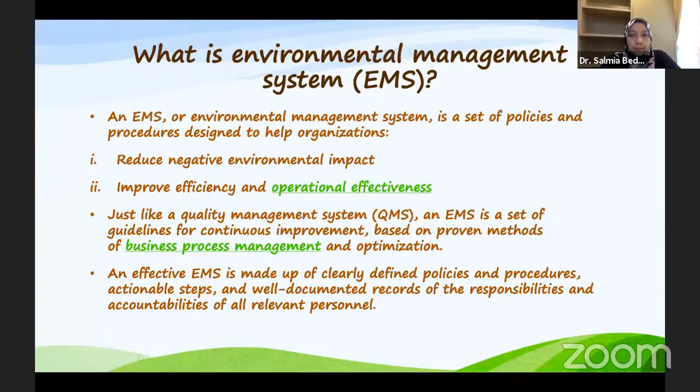What is the benefit of ISO 14,000? From the ethical part, it's our duty to look after the world and hand it down in good shape to the future generation. We hope that our kids, maybe in another 20 years, can still see all the trees, all the grasses, everything, so that they know the world is yet to be depleted. If we want our kids to see what we actually see nowadays, it's our duty to take care of our environment.

From the economic benefits, we also need to take care of conserving resources and not generating waste products or waste energy. We need to minimize the waste and also optimize it for recycling activities, for example.

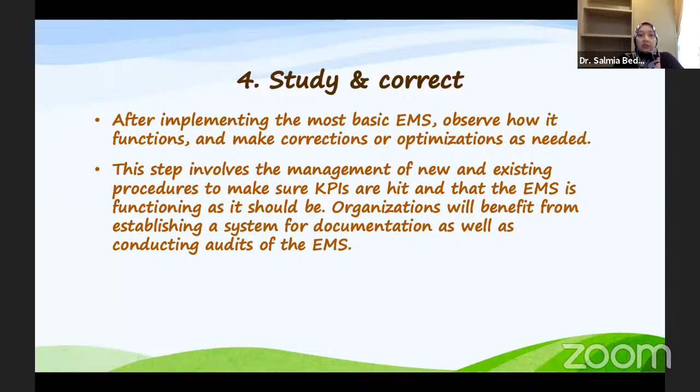Right, then after the planning, implementation is coming. This step will involve the execution of the plan. After implementing the most basic EMS, observe how it functions and make correction or optimization as needed.

Then after that, the management review process, and finally continuous improvement. So what needs to be improved, along the 5 processes? In the continuous improvement, based on ISO 14000, the method we'll use is plan, do, study, and act - PDSA we call it. So this is under continuous improvement.

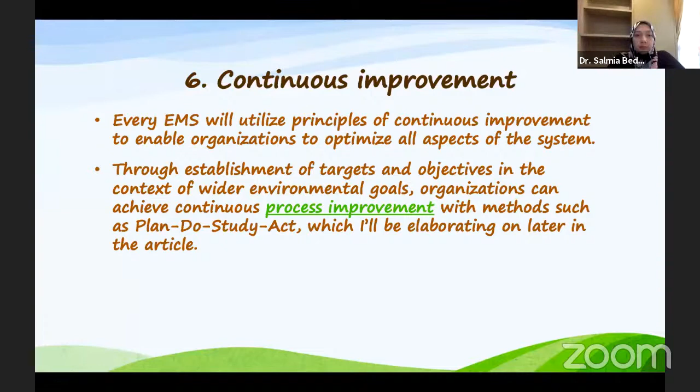So this is the principle of environmental management. I can conclude that environmental management is actually taking care of the environment. So how can we take care of the environment? We need to be certified. What else? We need to also be familiar with the environmental management system.

And then the awareness of sustainable development. Environmental legislation alone is not sufficient - some of it is not really sufficient. Self-regulation by industries, global competition on the products, and trade barriers, and there may be no standard indicator for industries that give environmental commitments. So it also requires a standard to take care of these demands in the form of management tools.

So EMS is part of the overall management system that includes organization structures, planning activities, responsibilities, practices, procedures, processes, and resources for developing, implementing, achieving, reviewing, and maintaining environmental policies. This is what EMS is all about.

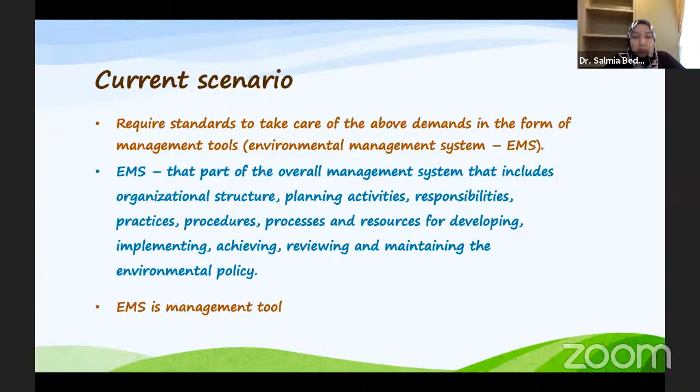In conclusion, EMS is one of the management tools. So common questions in EMS, related to the product - is the product able to reduce raw material input? This is a common question.

Less impact of material use, improve efficiency and lifespan. Is it more recyclable? And also packaging alternatives as well.

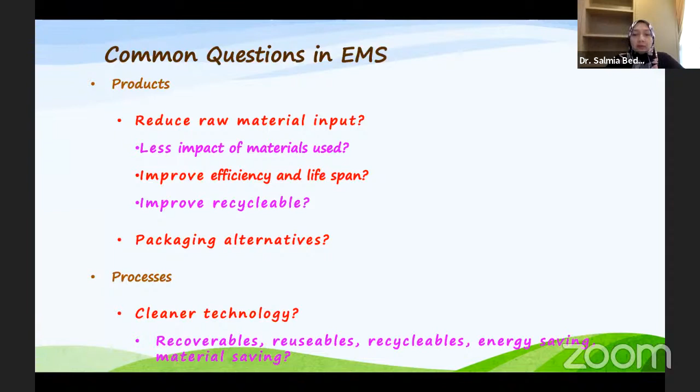Related to process - is it related to cleaner technology? Is it recoverable, reusable, recyclable, energy saving, or material saving? The use of natural resources - is it renewable energy? Is it less fuel? Does it maintain conservation? Or is it less polluting?

Some legislation - I highlighted here, this is the Environmental Quality Act in Malaysia, just as an example. In Malaysia, it is established by the Department of Environment, DOE, in 1976.

So we need to formalize this environmental management. There will be fines and penalties under restriction on pollution - maximum 500,000 ringgit Malaysia or up to 5 years jail, or both.

Compounding offense - the maximum fine has also been increased up to 2,000 ringgit Malaysia.

What else - there are 3 strategies in the act to regulate pollution. The other two are to prevent and abate any form of pollution. So we in Malaysia are also very concerned about the environment.

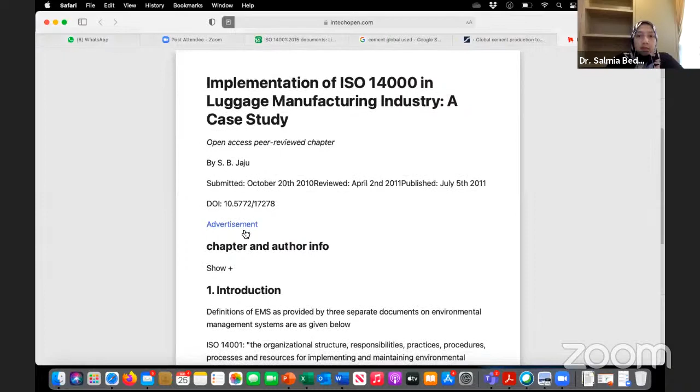I have also included here some case studies related to the implementation of ISO in the industry. This is the case study in the luggage manufacturing industry - they did this EMS in their canteen.

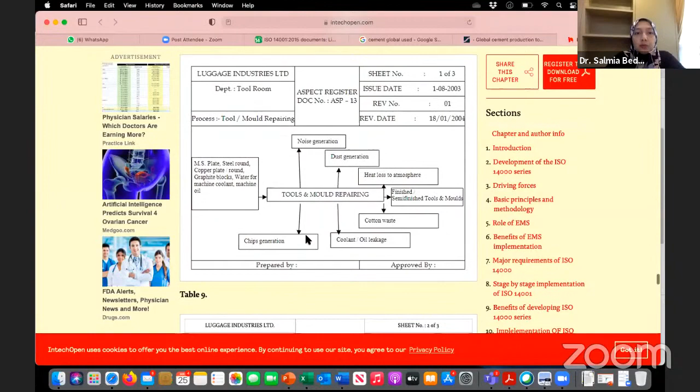And then finally, we will get this factor rating - is it significant or not significant? Students, maybe you can go through this after this - I will give you these slides and you can go through all these things. So this is how they documented ISO 14000.

Okay, and also for your information, Ford Motor Company also has accredited with ISO 14000. Okay, so some research, this is a case study as well.

Implementation of the environmental management system among the construction companies as well. So we did have all the studies, not only Malaysia, also Indonesia and around the world also has studied about this.

I would like to share some information. This is actually my area of research. Since I am in civil engineering, I have more knowledge on the construction industries, construction materials.

I showed you the 6 elements of ISO just now. One of the 6 elements is the recycle activities, material recycle activities. So this is part of the example of the 6 categories just now.

In the construction industries, we also concerned about sustainability. So what is sustainable materials? Mainly in the construction industries, it can be generally categorized into 3: environmental benefits, economic benefits, and social benefits. Under sustainable materials, all these factors need to be fulfilled or not.

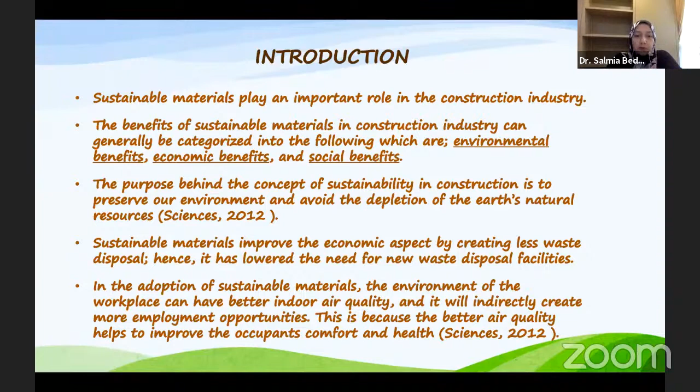By adopting sustainable materials, for example, the environment workplace can have better indoor air quality because we have less waste. It will indirectly create more employment opportunities, because we are recycling, so maybe there will be a factory for recycling everything, creating more employment opportunities. Also, better air quality helps improve the occupants' comfort and health.

This is the one I mentioned to you before, and then the green materials. Green material is one that simultaneously does the most with the least, fits most harmoniously within ecosystem processes. It helps eliminate the use of other material and energy, as well as contribute to the attainment of a service-based economy. So it is actually based on the environmental concern.

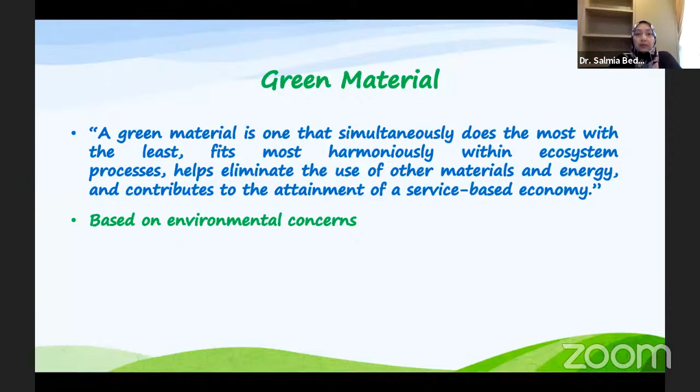What is the environmental concern through the regulation? First is water. As you know, we get the water from the river, water bodies and seas. Is our water clean? Is our water polluted? That one we need to put into concern.

So ground surface - is our ground polluted or not? As well as air - the one that we breathe now, is it polluted or not? So interrelation as well as ecosystem - is there still any bird singing around us? Is there any butterflies flying around us? That is part of the ecosystem.

Environmental concern in construction. You know what construction is, right students? Are you okay if I share this? Okay. Every day we can see construction. Construction is we construct a house, maybe we construct a very high-rise building. We construct the places to make it more like we have everything there. So that is construction. Civil construction activities like buildings and other engineering structures like bridges.

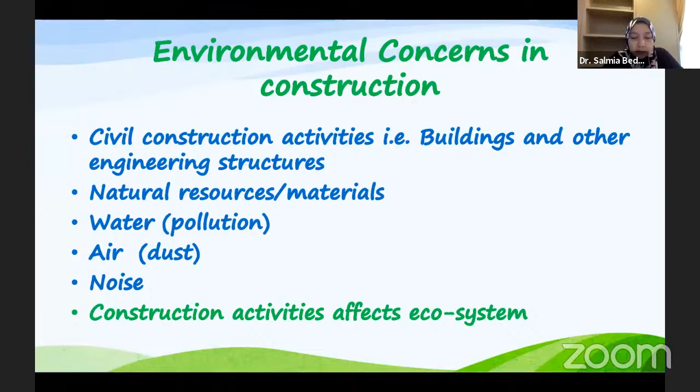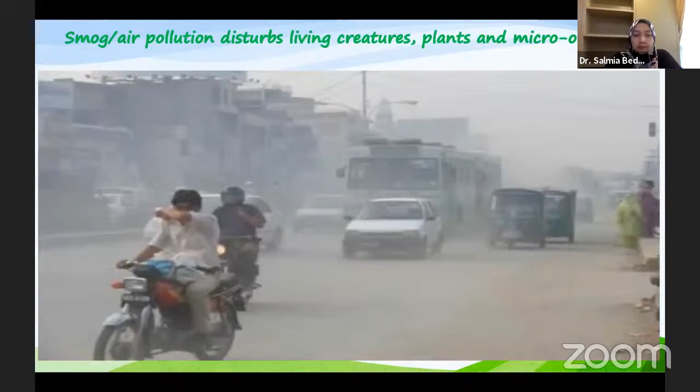This is air pollution. Please remember, all these construction activities are going to affect the environment, so this is an environmental concern. What we need to do is sustainable development - that is the only answer, which needs to be properly defined before the courts considering engineering concerns.

Sustainable building or construction materials are part of sustainable development. As I mentioned, sand is part of the construction material - we use it in making concrete. This photo is showing the activities of sand mining. We take this sand and mix it with cement and stone, with the proper ratio, and then use it to construct a building.

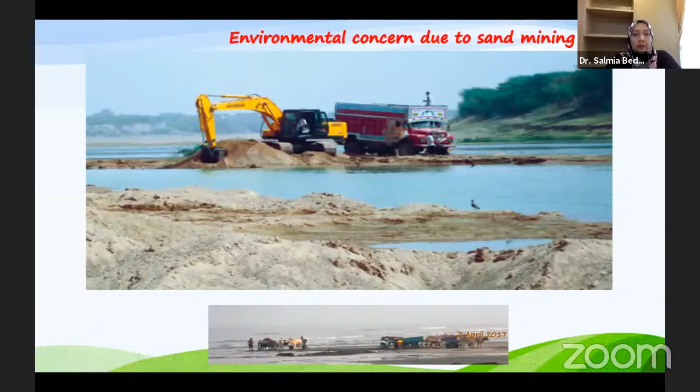We also need to consider our environment. What happens if the sand is finished? If we still want to use natural sand, what happens if one day the natural sand will be depleted? Are we still going to have construction activities? Are we going to be able to construct our house, our very beautiful house? This is the impact of sand mining. So what can we do?

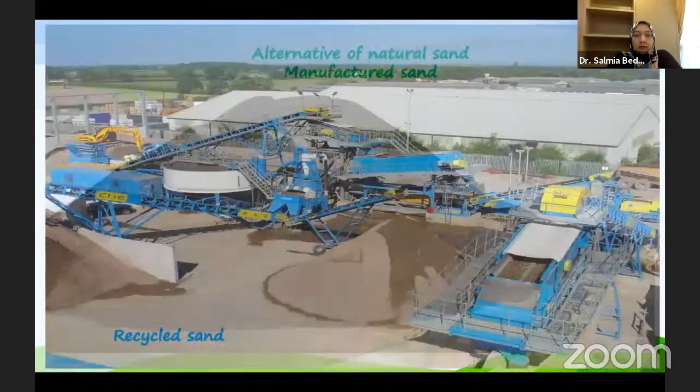We can think of having an alternative to natural sand, which is manufactured sand. It can be recycled. Manufactured sand is not natural sand - it can be recycled sand, or it can be waste from other industries.

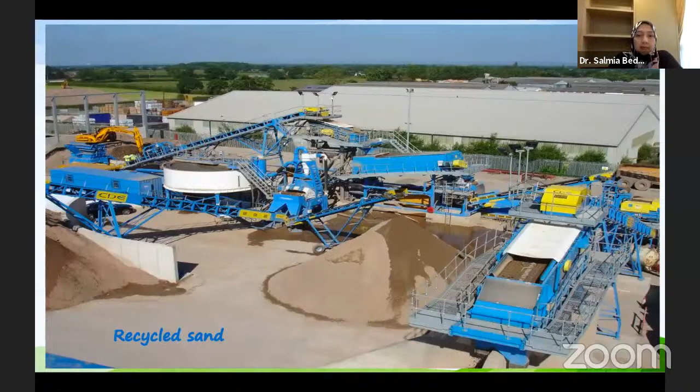So there's environmental concern on the stone quarrying and aggregate. You can see there is a lot of dust and everything, as well as we are using the natural resources as well.

This is the production of construction material as well. We use limestone - we burn limestone to produce cement, and also gypsum. So these are the natural resources for cement production - you can see limestone and gypsum. If we use these continuously, then all these resources are going to be depleted.

As industrial players, technologists, academicians or engineers, we need to think about this. What else can we do, rather than taking all the natural resources that, of course, one day are going to be depleted if we don't stop or reduce the usage?

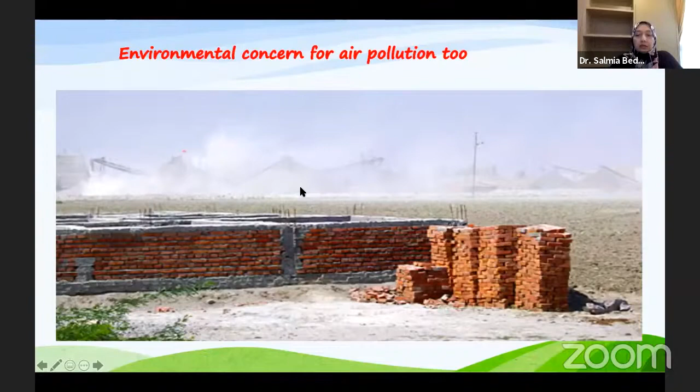There's also environmental concern for air pollution, based on aggregate production as well as cement production. We can have recycled aggregate - for example, we can get this recycled aggregate from waste from industry, like slag. Slag is actually the waste from metal production.

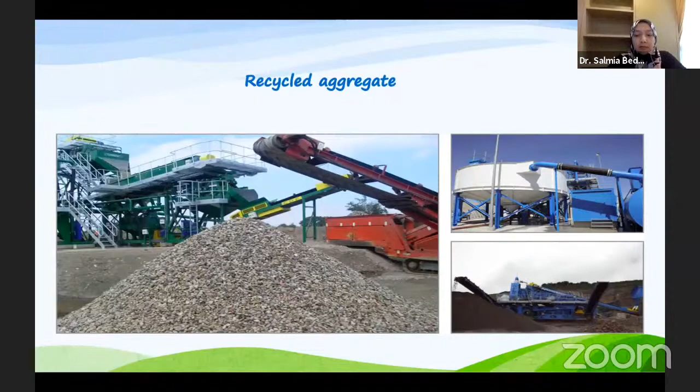It also can come from plastics, and it can also come from building demolition activities. So if you have a building that's already 50 years old and not functional, and at the same time you are going to construct a new building, the existing building needs to be demolished. The building material can still be used - it can still be recycled, and we can use it as recycled aggregate.

You have your fan and you are staying very comfortable in your house now, right? So it is actually because you have enough energy in your house, energy to switch on all the fans, all the air conditioning, all the lights in your house. So it is actually coming from the energy. So energy generated from where?

Energy generated from power plant, right? So from the power plant, the energy will be brought to your house. So what does the power plant do? The power plant is burning coal, arang batu, to generate the energy.

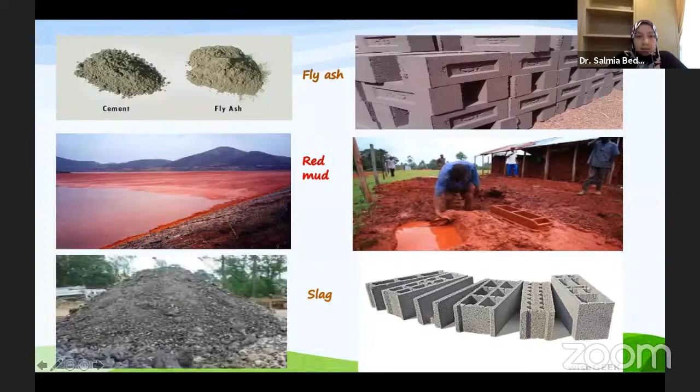So this is an example of sustainable materials. There is a brick, and then you lay a brick, then finally you can actually build a house or building. Just an example.

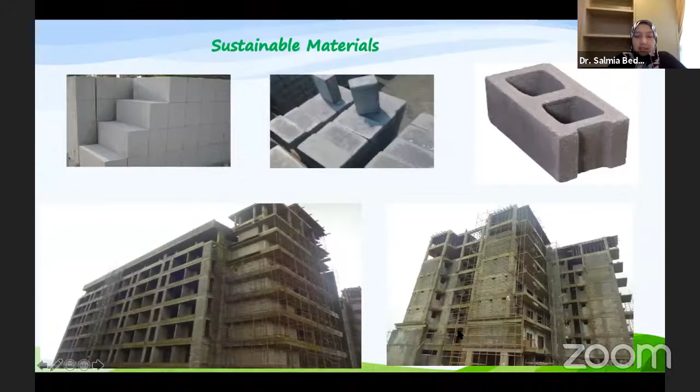Here's another example: create the bricks by mixing waste from nearby glass, ceramic, and insulation factories, and sometimes rejected clay from the traditional brick factories. Then they mix them together, and you can see it is possible to build a house or building using the recycled materials.

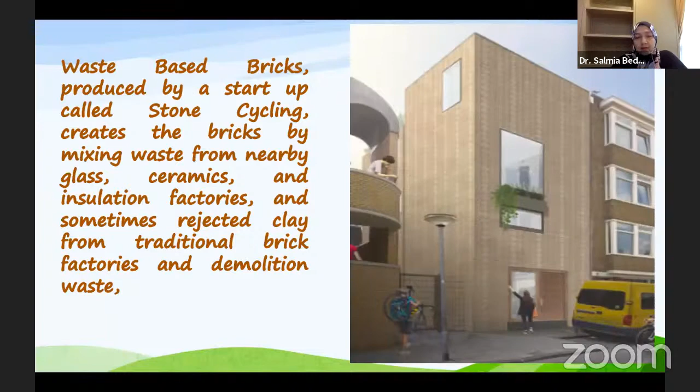The waste glass also - you can see it is also possible to have these beautiful surfaces, right? It is made from the waste glass.

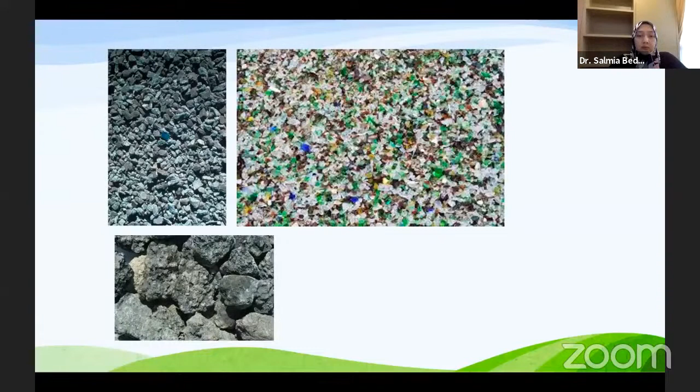So for the aggregate, why do we need sustainable aggregates? Because we want to reduce the usage of natural resources. This is part of the example.

Recycled concrete materials - so the concrete, you can hack and make it into smaller sizes like the natural aggregate, natural stone, and then you can use it as part of the construction materials, other than using the natural aggregate.

Aggregate, recycled demolition waste aggregate also can be used, and the slags - this is the slag I mentioned to you just now. Also some manufactured sand for concrete, recycled glass aggregate, the slag, and the fly ash.

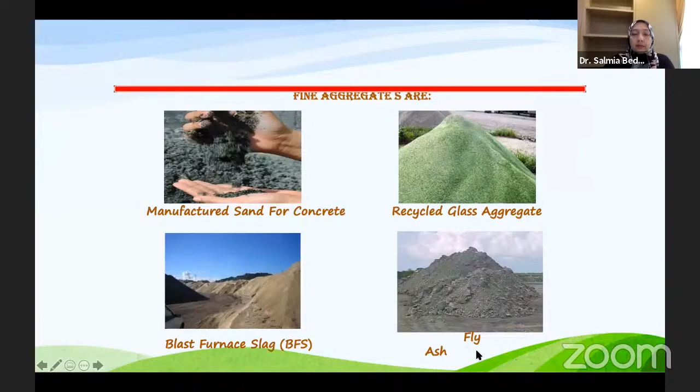But of course there will be challenges in using the recycled materials. It will not be 100% similar to the natural material, of course. For example, maybe the quality is not as good as natural material, of course.

But of course, if you want to make it comparable with the natural materials, we need to have investment on the treatment. We need to treat that material before we use it, because there are some drawbacks or disadvantages of this recycled material if we use it as it is.

A lot of research has been done on this, and some of the findings mention that there will be some effects in terms of material quality. In construction material, we can say in terms of durability - it is less durable compared to when we use the natural material, but it's okay.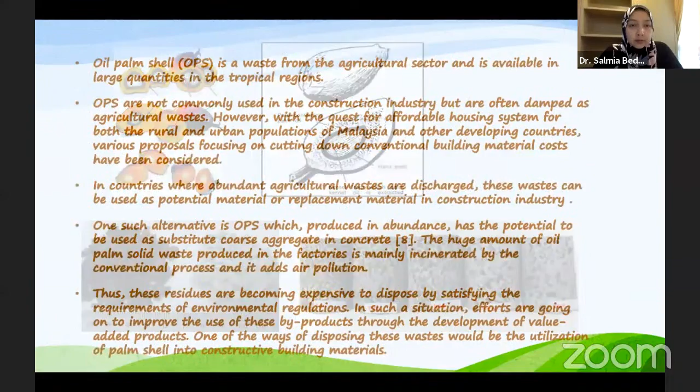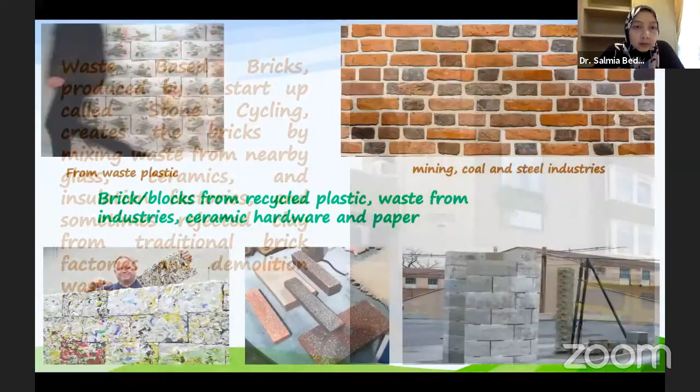I show you just now, the limestone. This one, limestone and gypsum, this is used for the cement production.

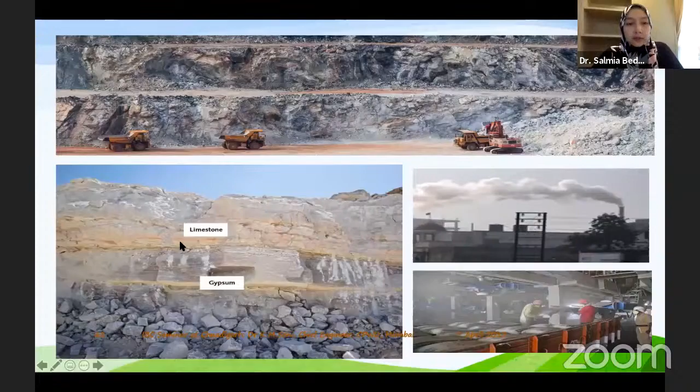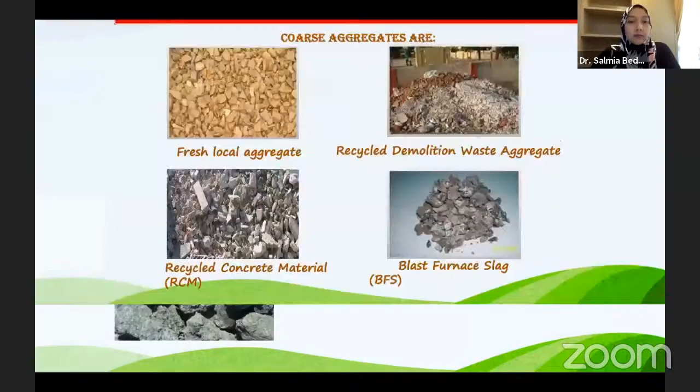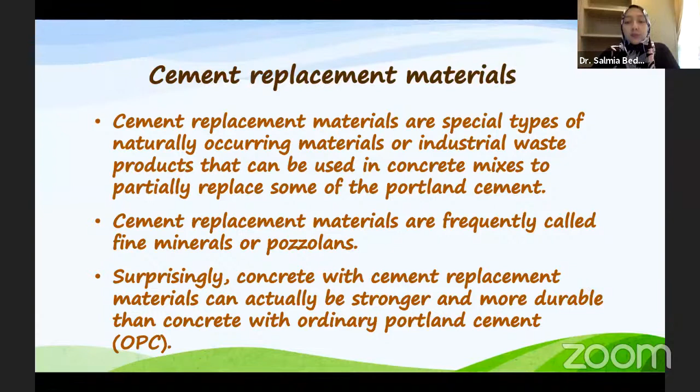If you can see here, this is the statistic of the cement production. You can see Indonesia is listed here, major countries in worldwide cement production. The usage is high, this is production in million metric tons. You can see, it's a lot, the usage of cement.

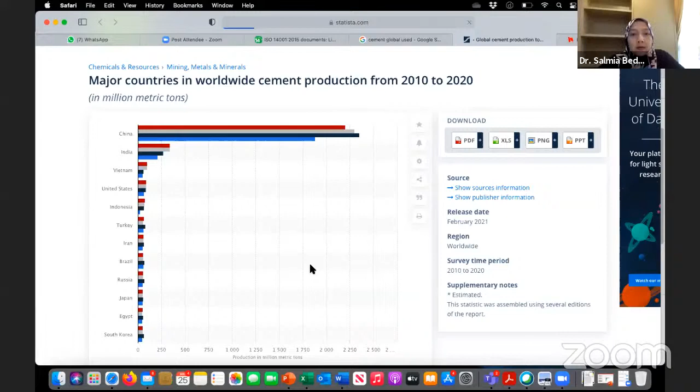According to the statistic, the usage of concrete around the world is second next to water. We are using water every day, right? So the highest consumption around the world is water, and the second highest consumption around the world is concrete. Because the development is here and there around the world, we are using a very high consumption of construction materials: cement, stone, as well as sand, in very high consumption.

This is the fly ash that I mentioned to you before, so it's coming from the burning of coal in the power plant to generate electricity, generate energy. Surprisingly, the properties of this fly ash have advantages in terms of properties, the characteristics, and it is possible to reduce some amount of cement.

At the same time, it can increase the properties of the concrete. So that means the quality of the concrete that you get if you use fly ash, maybe with some replacement of cement — for example, you replace about 20% of the cement using fly ash — then you will get a better quality of concrete. This is proven.

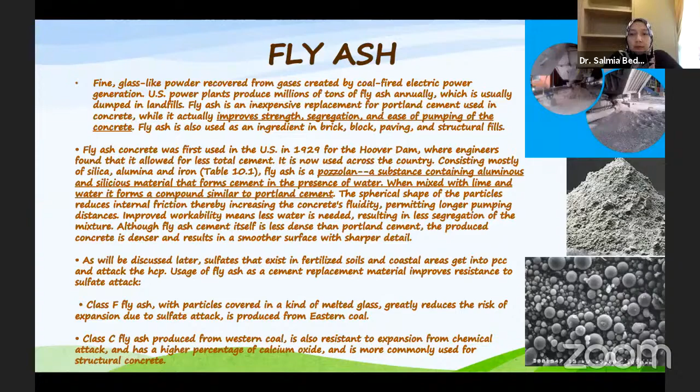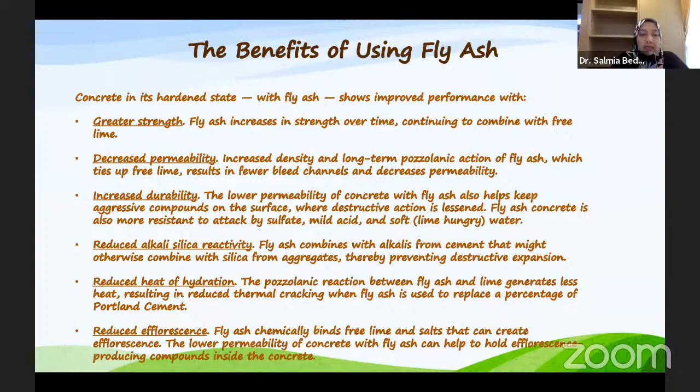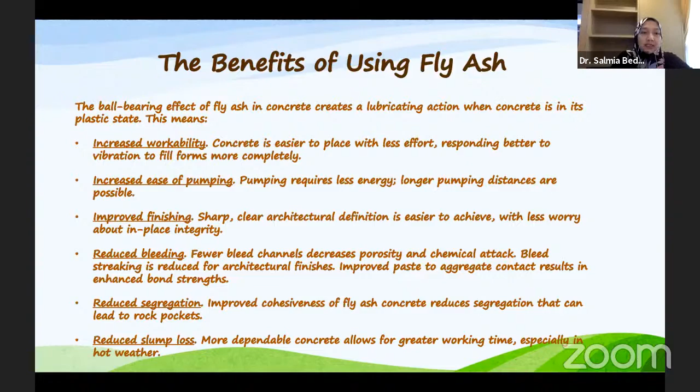Maybe this is too technical, so I just put the information here. If you're interested, you can read. This is too technical, I think, for the green technology student, but it's okay, if you're interested, then you can take a look.

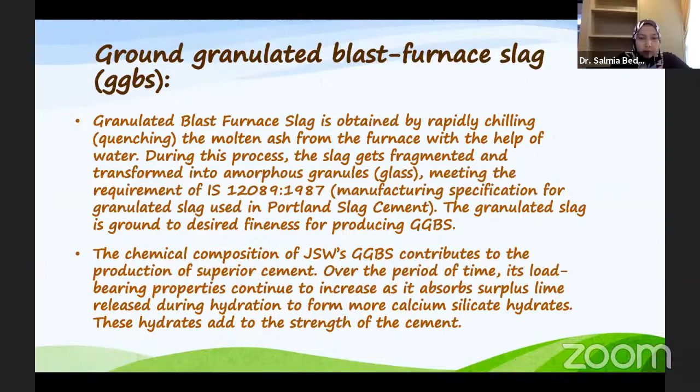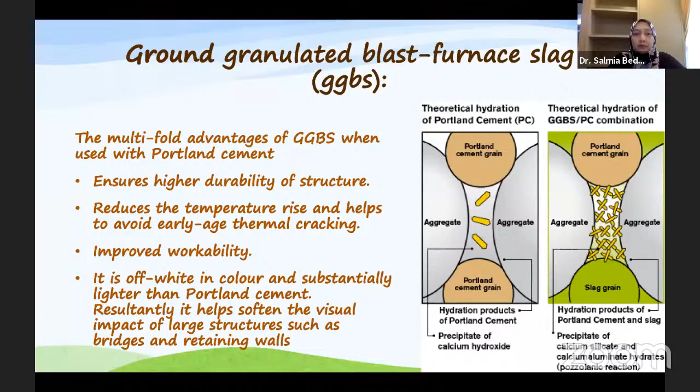So this is granulated blast furnace slag. It's like fly ash, but this is the waste coming from the industries of steel production. It also has a very good characteristic, and it is possible also to use as cement replacement material, and it will give you better quality of concrete. Better quality of concrete means what? Your concrete will be stronger.

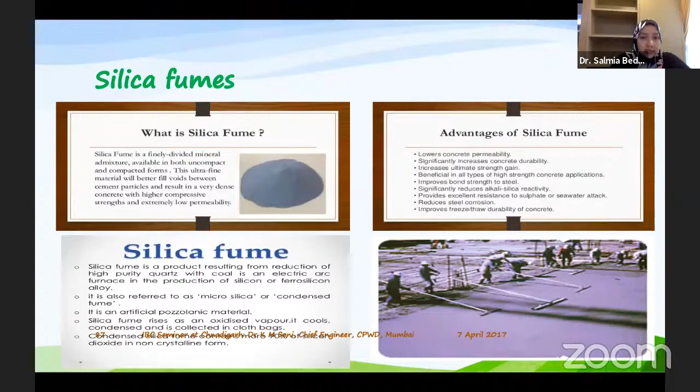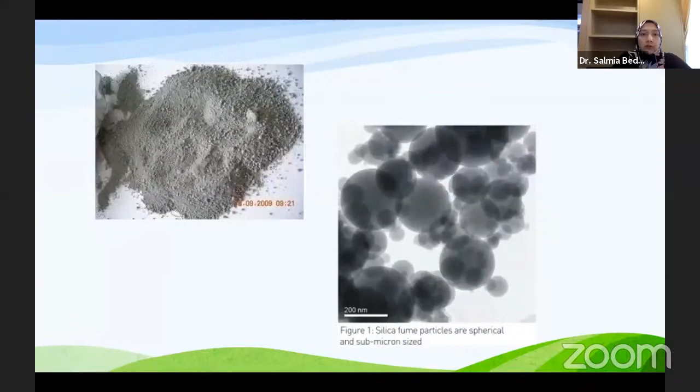Okay, so silica fumes. Okay, and also has good characteristics, and also can be used in cement replacement.

Okay, rice husk. Do you know about rice husk? Rice husk is produced from the paddy tree, the rice plant, to produce rice. This is the part that covers the rice, okay, rice husk. So rice husk also has potential to be used after you take out the rice. Normally in the rice mill, the factory that produces rice, they will burn this rice husk with high temperature to dry the rice.

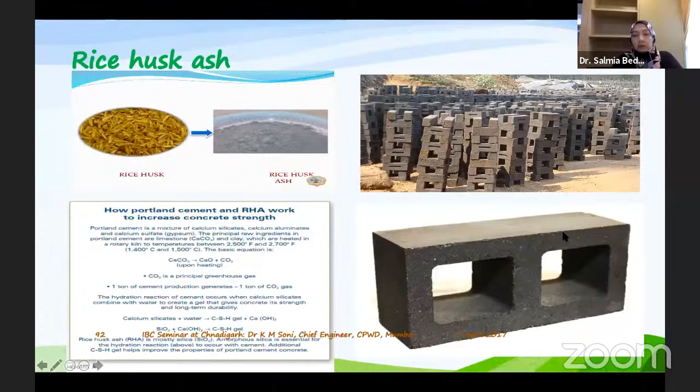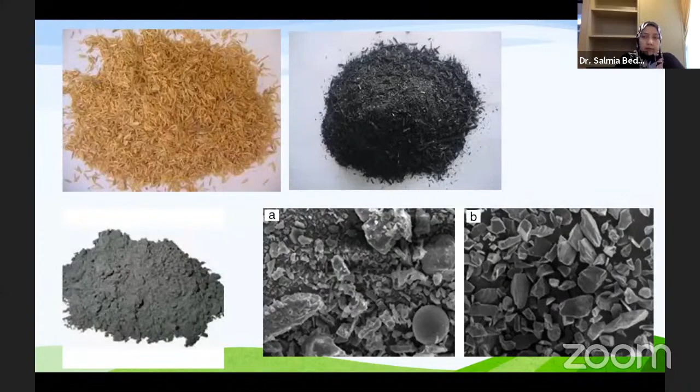So after burning, of course, there will be waste. We call it rice husk ash. This is the waste, and based on characteristic studies, there is potential to use this as construction material. This is the example, it can be used to make bricks. So this is the rice husk after burning, and then we can use it.

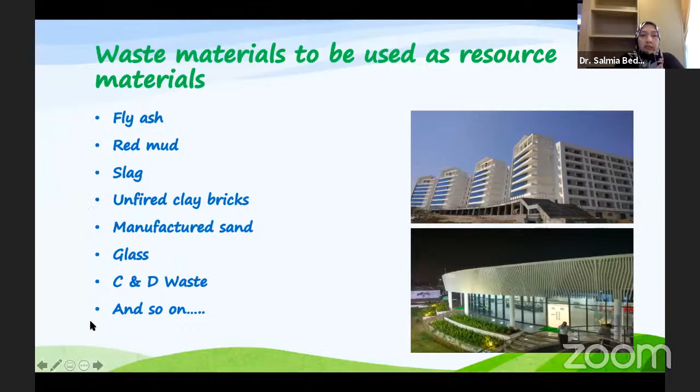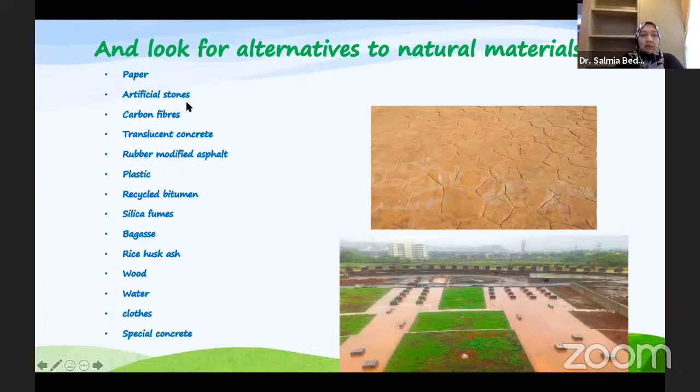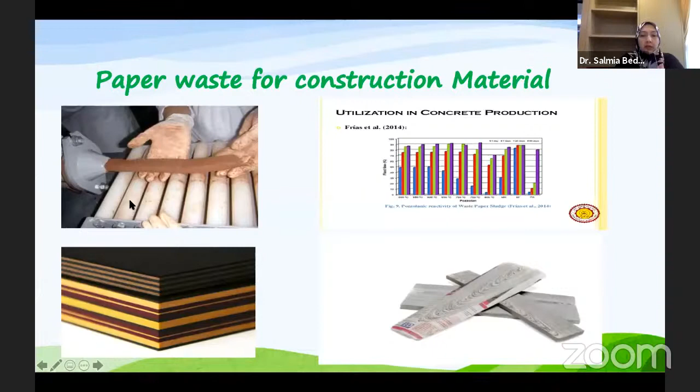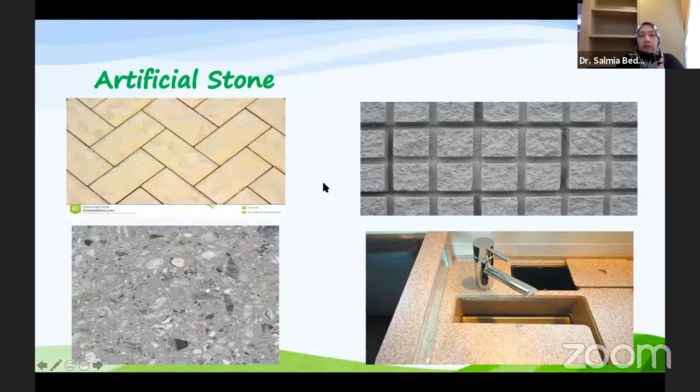So this is listed here, the ones that I mentioned - paper, artificial stone, carbon fibers, everything. So another example is waste paper, they use it in construction materials. And artificial stones - this is made by combination of glass, and you can have very beautiful surfaces using artificial stone.

Rubber modified asphalt. So if you have rubber, this is waste, right? You can recycle this into small pieces and then mix it with the asphalt - this is the black color asphalt. Then you can mix the rubber together, and you can see it produces a very nice road surface that can be used.

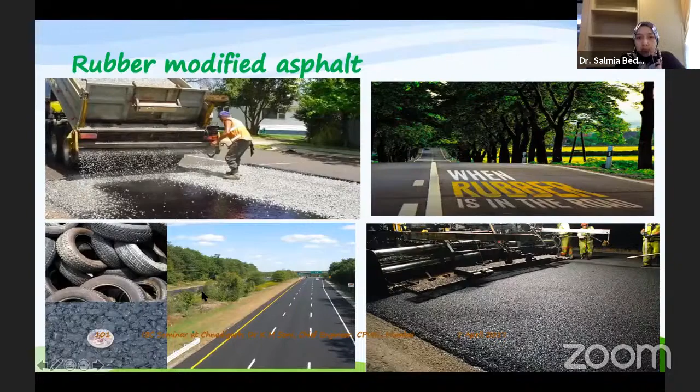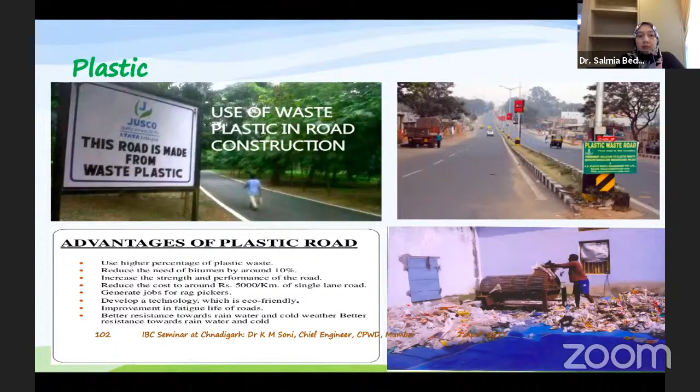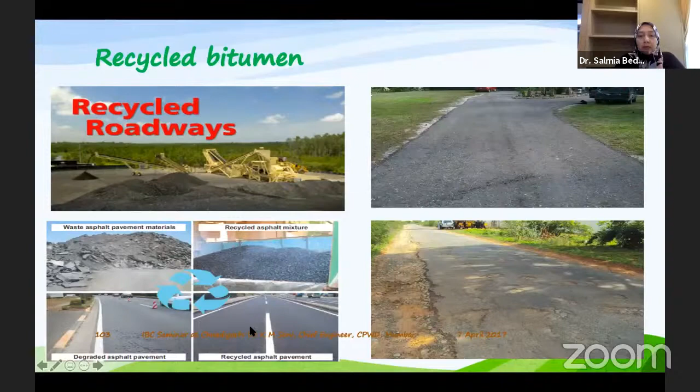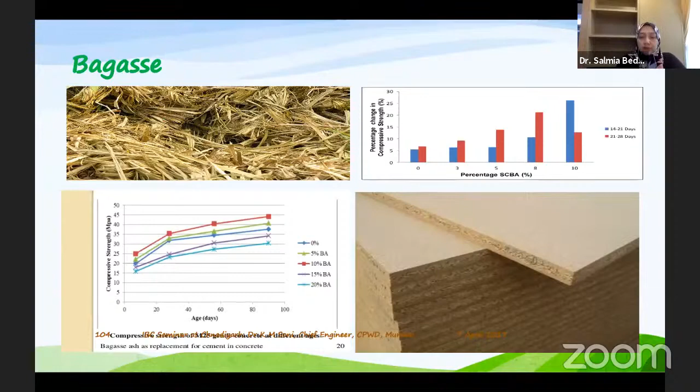Just recycle it. Okay, so bagasse, this is sugar cane, can also be processed and made into a board like this, and we can apply it into cabinets, doors - manufactured wood board. This is normal material we use for our cabinets.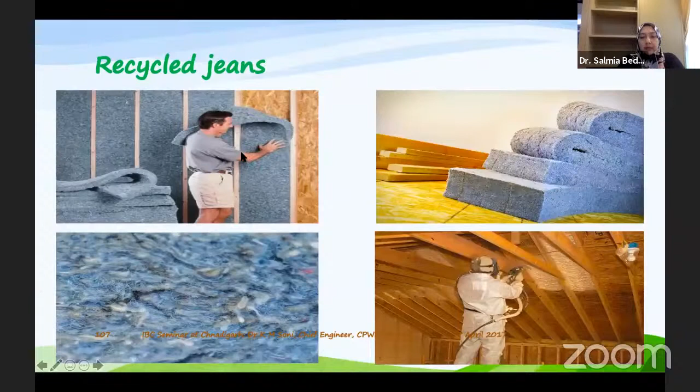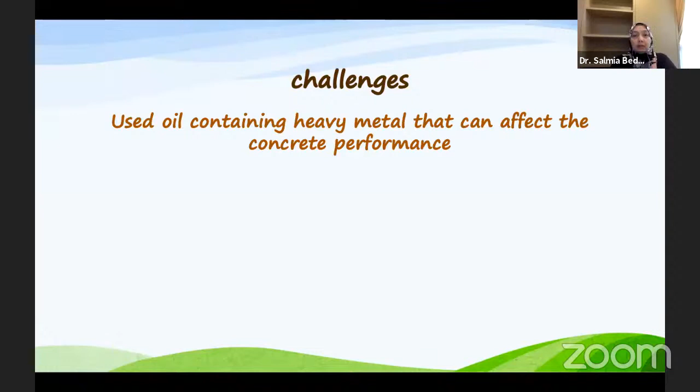Okay, some information here, I don't want to go through because it's too technical. So just to mention, in the construction industry it is possible to use waste, not only to save the environment, but surprisingly, using waste in construction industries can also improve the quality of the materials.

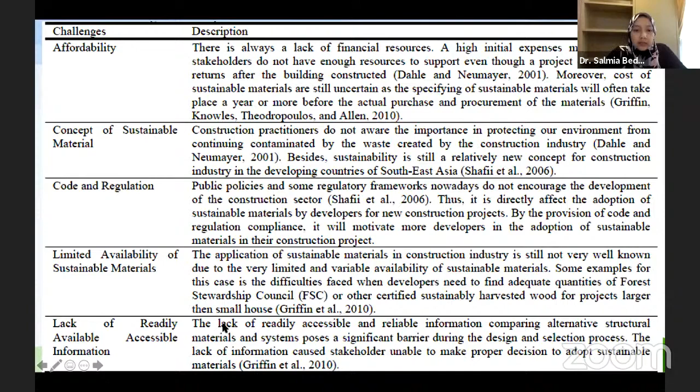So lack of readily available and accessible information is also part of the challenge.